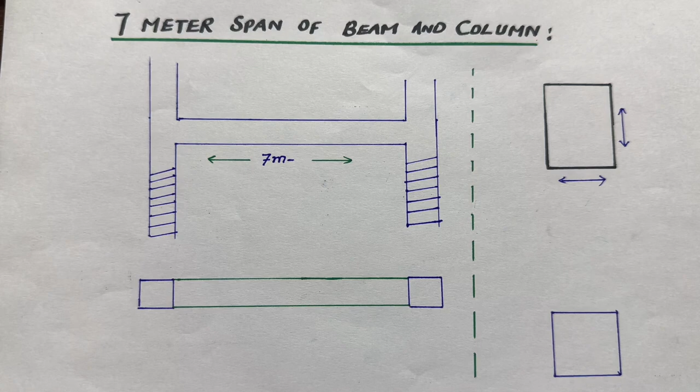Welcome back to Civil Engineers YouTube channel. In this short video lecture, I will guide you for 7-meter span of beam and column.

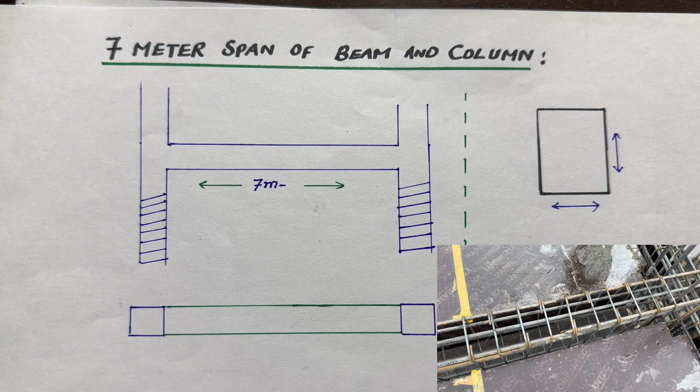If you want to build your house and the span is up to 7 meter, or from 5 to 7 meter, the span of beam and column, what should be the size of column, what should be the size of beam, and inside steel reinforcement details. This is just for G+1, ground floor plus first floor. So I am guiding you for this important video, especially inside this we have a steel structure design.

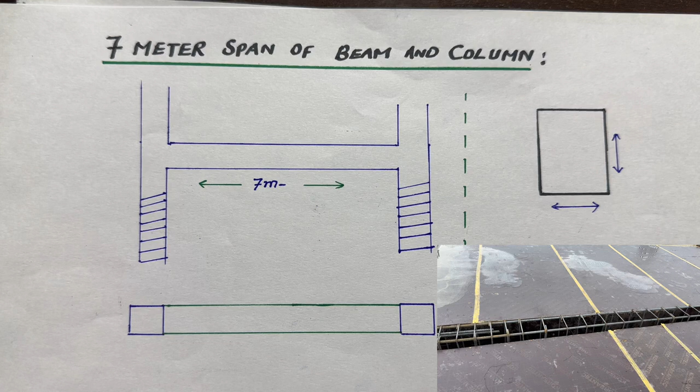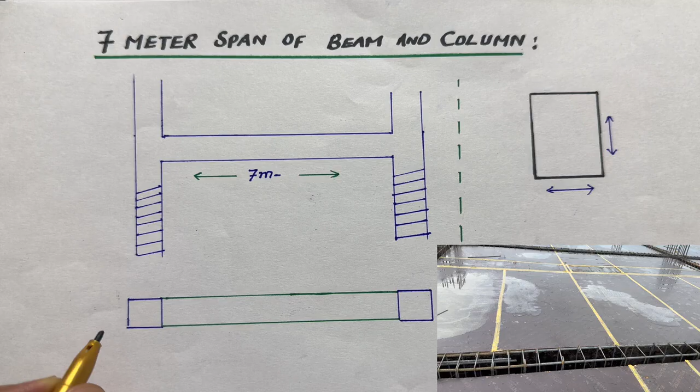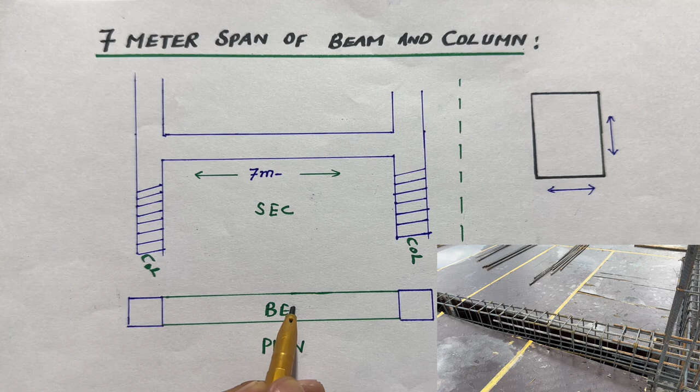So first of all, if you see, guys, this is one column and this is other column. So this is the section, this is section, and this is plan of column and beam. This is its plan. If you see, this is beam, this is also beam, and this is column, COL. This is also COL. So this is plan and this is its section.

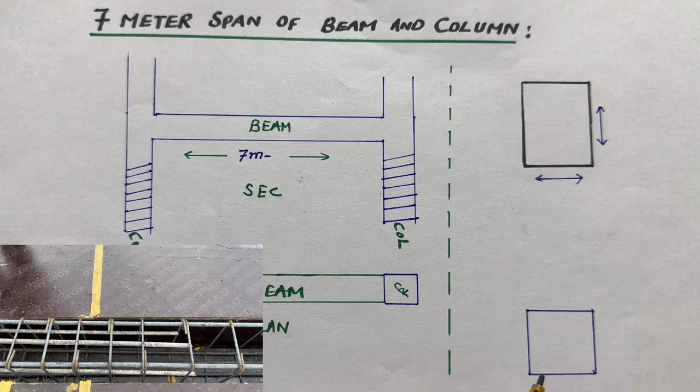Here I will write the size of beam and its steel reinforcement. This is the column. I will guide you for size and inside steel reinforcement for G+1 story. So let me write here, this is specially for

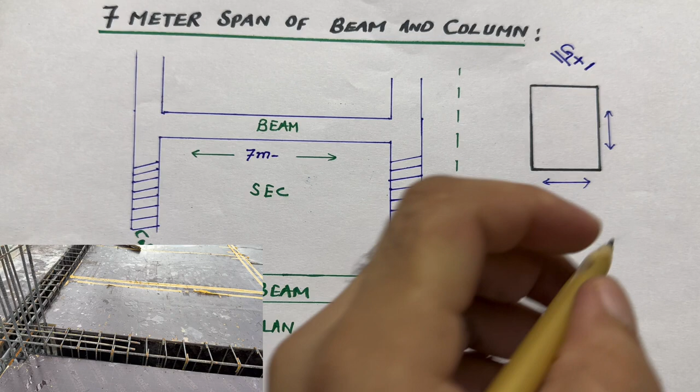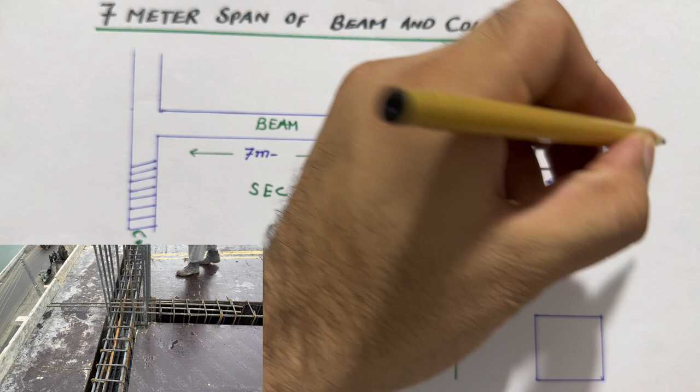G+1. Remember, guys, the span up to 7 meter, the size of the beam should not be less than 0.3 meter by 0.45 meter, or you can say simply, size of the column should be 12 inches by 18 inches. So this is the size of beam, not column, sorry.

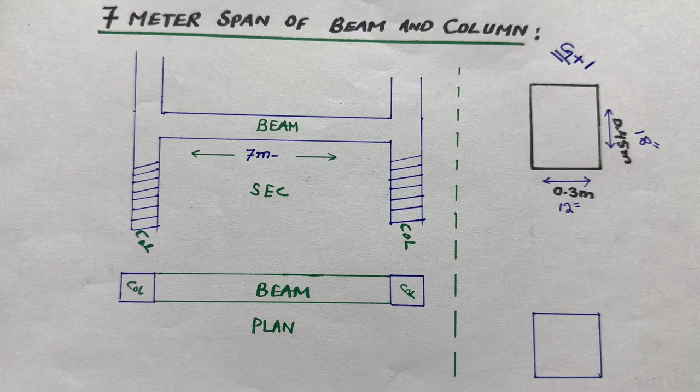Now let me guide you for its steel reinforcement details. Here, if the span is 7 meter for G+1 story and the size of the beam is 12 by 18 inches, use here 4 bars at the bottom, 1, 2, 3, 4, and 2 at the top. 6 numbers of bars are required for G+1 and the size is 12 by 18 inches.

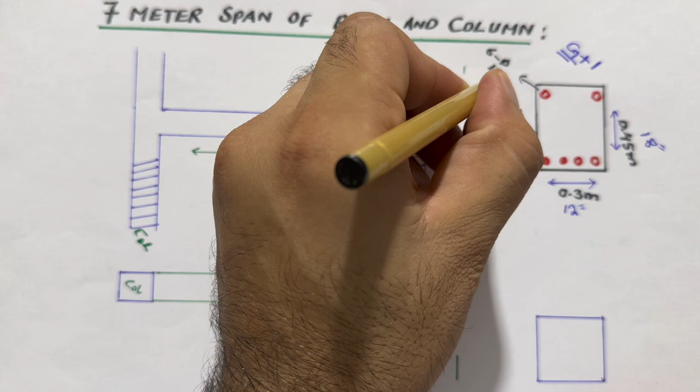Now what should be the diameter of each bar? We required 6 bars and the dia should not be less than 12 millimeter. This is its details for steel reinforcement.

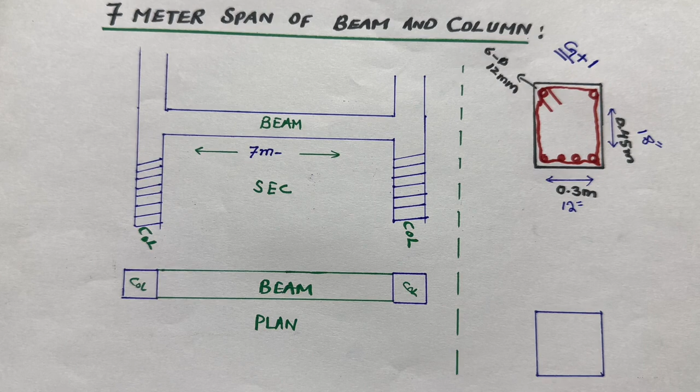Next, guys, here use the stirrup dia. What should be the diameter of stirrup? You can see here, this is stirrup, this one, and these are hooks. Remember here, the stirrup dia should not be less than 8 millimeter with the spacing of 0.15 meter center to center, or you can say 6 inches. This is its details for the stirrups.

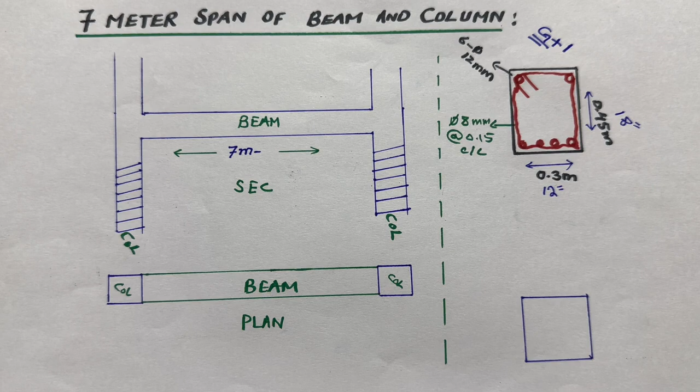Next, guys, the hooks should be bent on 135 degree. You can see this hook, and the length should not be less than 3 inches. So the length should be 3 inches and it should be bent on 135 degree angle. This is very important. So this is floor, this is beam steel reinforcement.

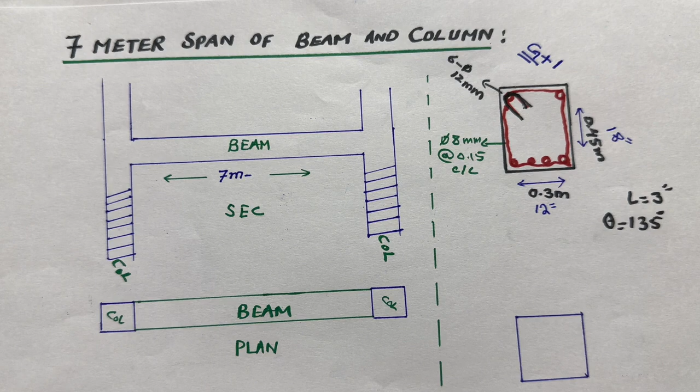Next, guys, if this is plinth beam or top beam, why not? At the distance of L/4, we also require this if it's a floor beam. Suppose I am providing on top of this, if I am using RCC slab, there we have negative bending moment and positive bending moment. So at the distance of L/4, we are providing extra steel rods like this at the upper portion.

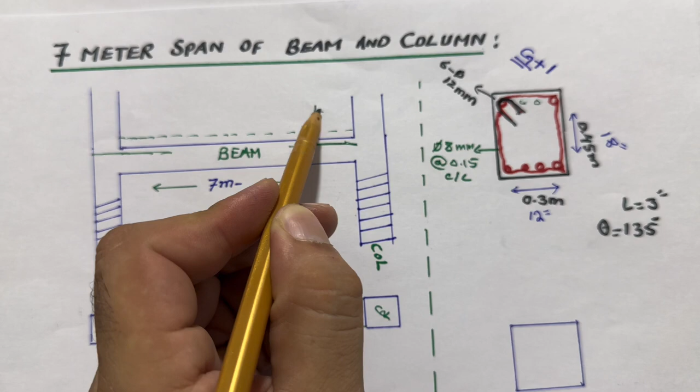So 2 bars are provided at the distance of L/4, means 7 divided by 4. Also at this side, because here we have negative bending moment, but here we have positive bending moment. Therefore we have 4 numbers of bars at the bottom and 2 at the top, 2 are extra bars like this, only at the distance of

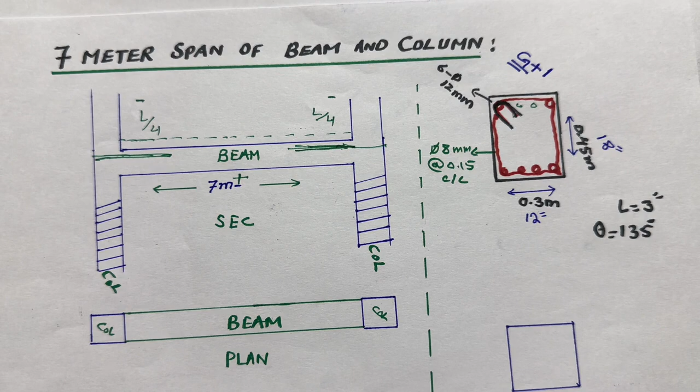L/4. Next, guys, if you see here the column, the beam details I have already discussed in front of you. So now let me guide you for the column steel reinforcement and its size.

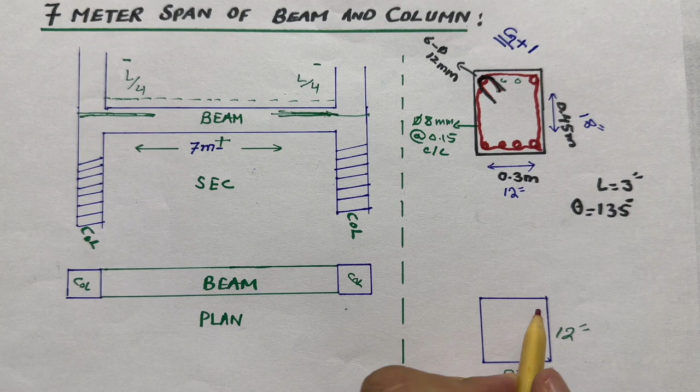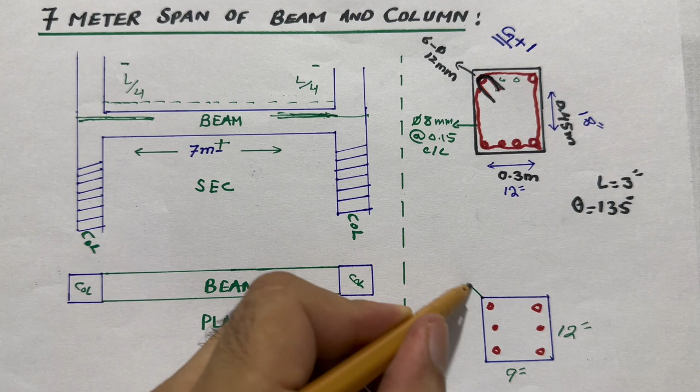The size of the column should not be less than 9 inches by 12 inches, with 6 numbers of steel rods, 1, 2, 3, 4, and 5, 6, and each bar dia should be 12 millimeter, as you can see, the dia is 12 millimeter. How many numbers? 6 numbers.

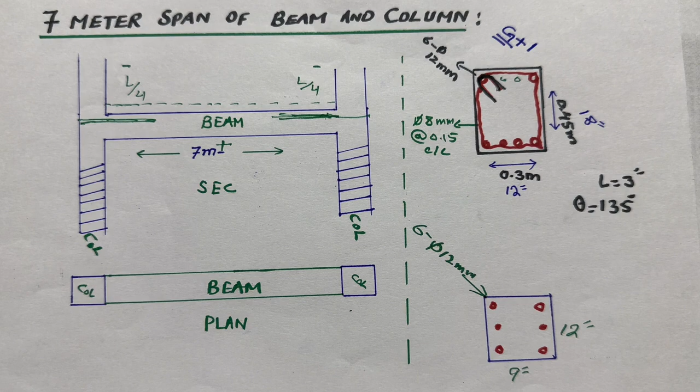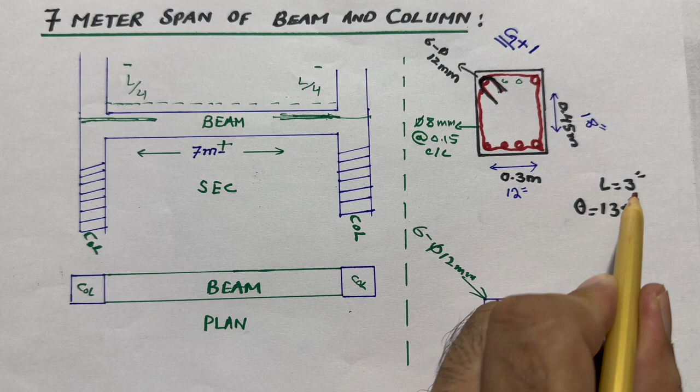Next, if you see its details for this ring, guys, you can see this is the ring, this one. So hooks should be provided on 135 degree, as I discussed before. Length should not be less than 3 inches, and the dia should be the same, minimum 8 millimeter, with the spacing of 6 inches or 0.15 meter, or you can say 15 centimeter.

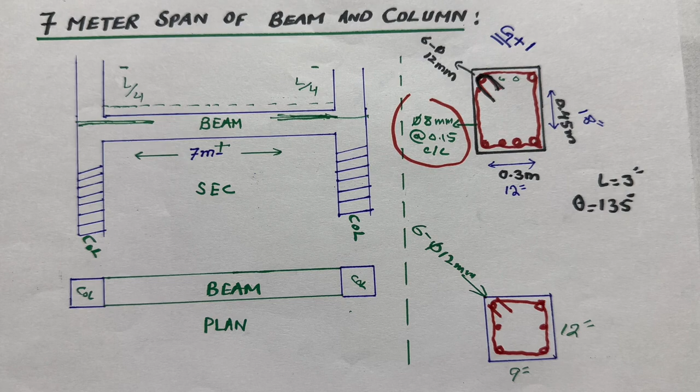So this is the size of column and inside steel reinforcement.

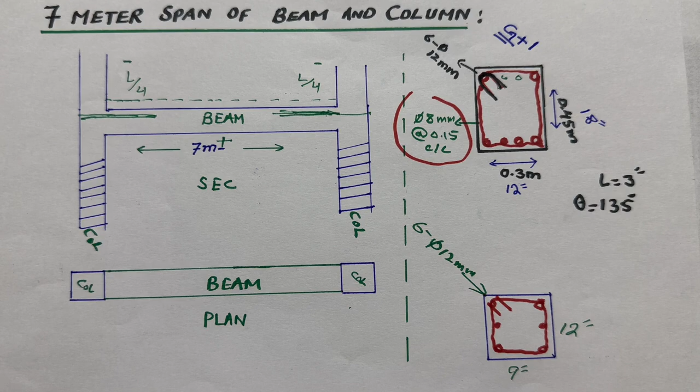Now let me guide you for one important thing here inside the column and beam junction, where we have negative bending moment. We are providing steel reinforcement same like this. You can see this is for beam, the other one is also here. So here we have the steel reinforcement like this, the bottom is also going to the downward side. So here we are providing, you can see like this, this is development length, and the upper portion steel is going to the downward side. So development length is very important.

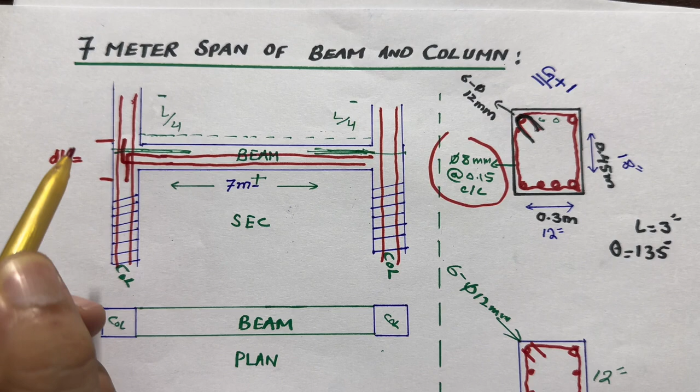DL, it should not be less than 9 inches in this case, if we have for G plus 1 story. You can see clearly. Next, guys, we have 4 bars at the bottom, 2 at upper portion, 2 are extra bars if that is plinth beam or floor beam.

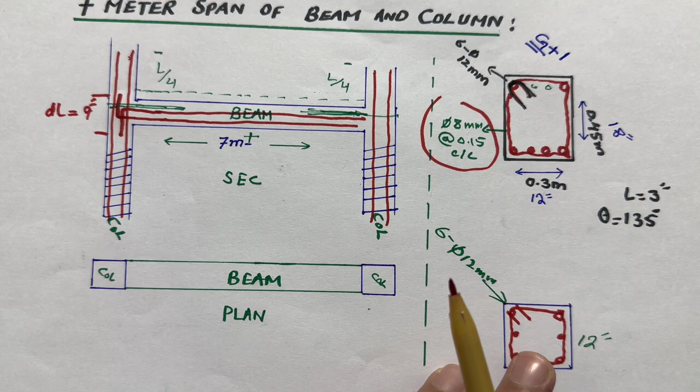Next, the column size should not be less than 9 by 12 inches for G plus 1 residential building, not for commercial building. You can see minimum 6 numbers of steel rods, the dia should not be less than 12 millimeter. Next, guys, you can see from planning and also from section, you can see how we can...